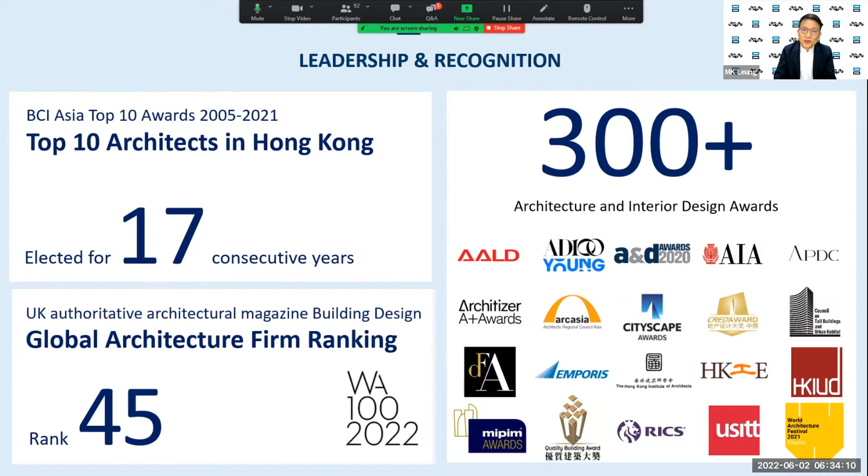We are so proud to join the World GBC Asia Pacific Network as its Advancing Net Zero partner. RLP has been named one of the global top 100 firms by the British media World Architecture for 9 consecutive years. We are the only architectural firm that has been shortlisted in the top 10 in Hong Kong for 17 consecutive years, with numerous green building awards locally and internationally.

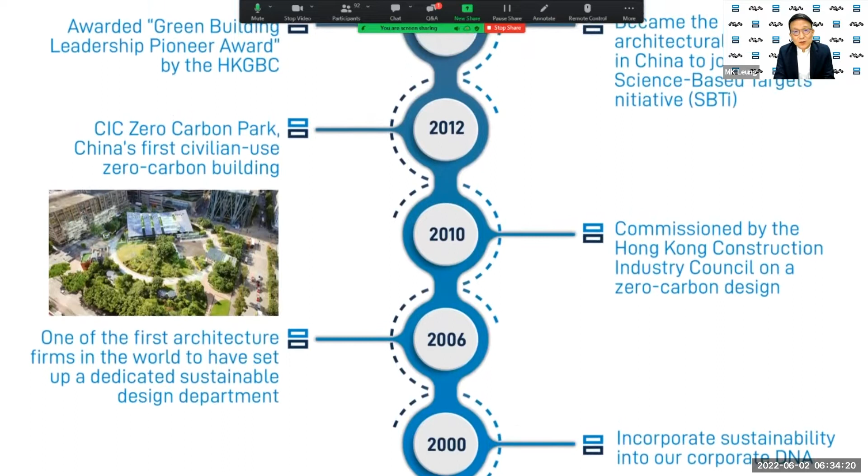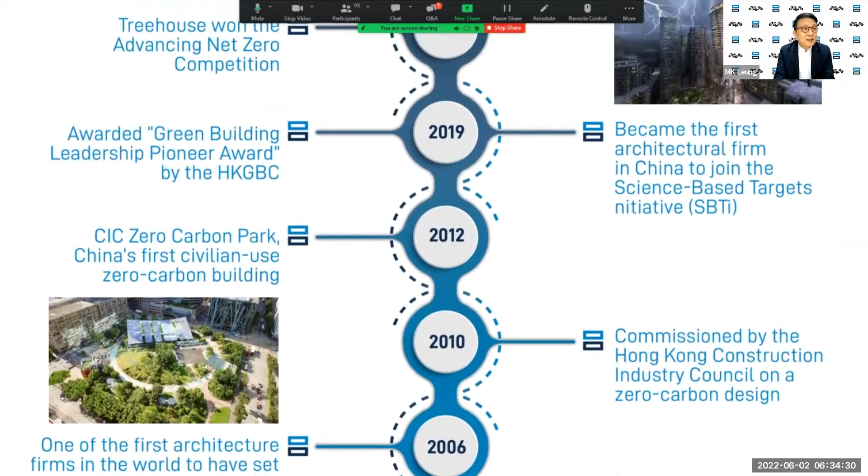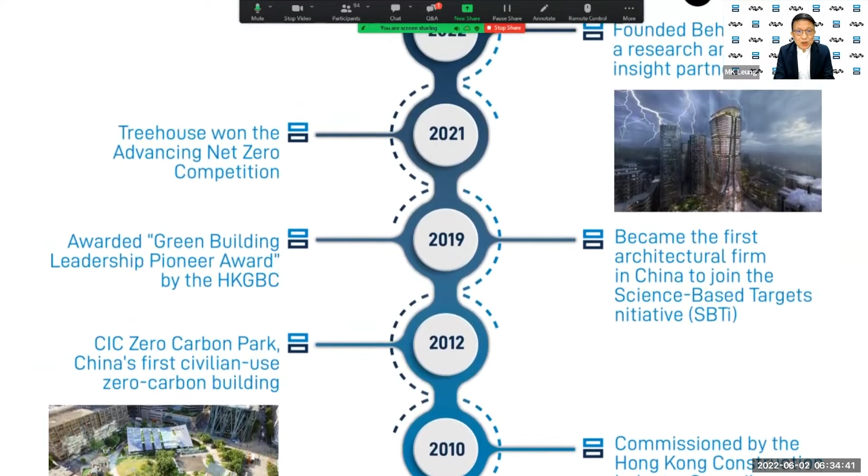On our sustainable design journey, we started about 22 years ago. We designed the first zero carbon building in Hong Kong back in 2010. We committed to our own corporate science-based target to reduce greenhouse gas emissions, and were awarded the Green Building Leadership Pioneer Award in 2019 by the Hong Kong GBC. Last year, our carbon neutral high-rise future workplace concept, Treehouse, won the Advancing Net Zero Ideas Competition organized by the Hong Kong Green Building Council.

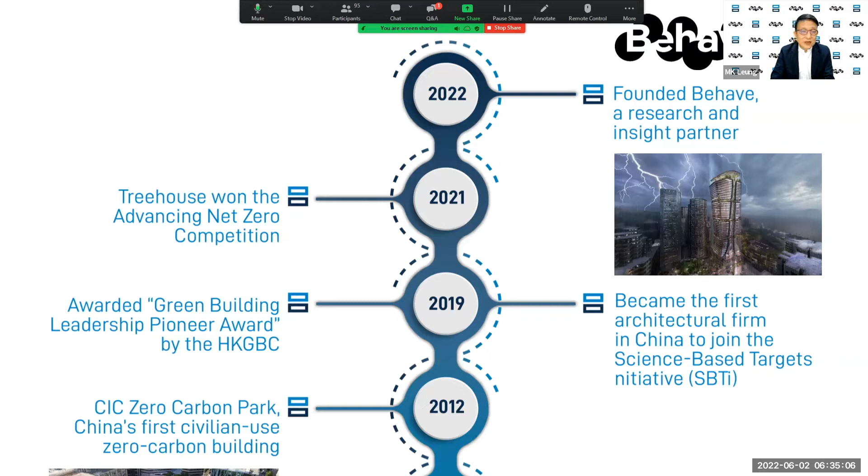The design was led by the research arm of our company named Behave. Behave will be officially launched this year, and our mission is to create future-ready cities. We seek to explore, understand, and design a more resilient future by putting people at the center of everything we do.

Cities are now at a crossroads. Technological disruptions, shifting geopolitics, effects of climate change, the global pandemic, these are all fundamentally changing how we live, work, and play. Our future generations aspire to and deserve a sustainable future. How we can create a sustainable future is more about people than technologies. It is ultimately driven by the aspirations and behaviors of this and coming generations, who are well aware of the causes and impacts of climate change.

The future of how we live, work, and play will definitely look different from what we experience today. Some people say the metaverse will be our future, where we will do everything in the digital world. However, research on the future of work indicates that hybrid work, comprising a balance of remote work and in-person work, is the most sought after model by employers and employees.

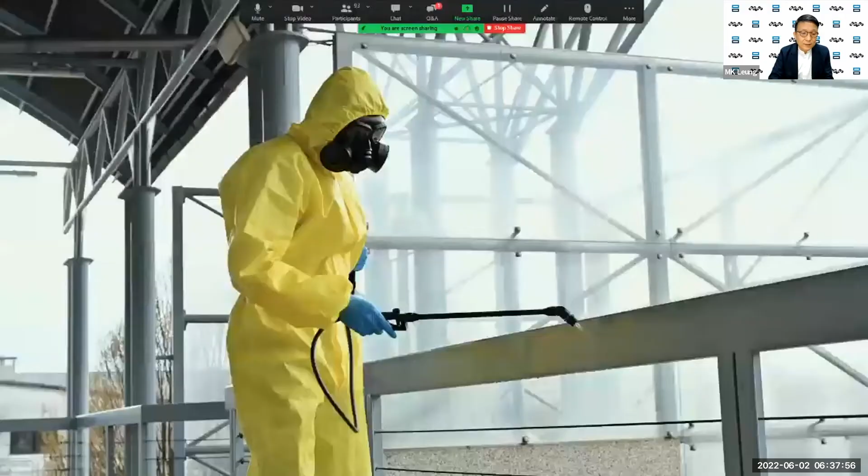We live in a generation of change. Global warming, pandemics, extreme weather have only inspired us to make change and create a resilient future by revisiting our roots. Nature, the one source that nurtures and gives us life. Nature wastes nothing, and in the perfect world, our existence not only complements it, but helps it thrive by achieving

carbon positivity. The concept of a sacred union between man and nature also runs deep in ancient cultures. Like the Chinese word for wood celebrates our place on Earth. Perhaps now is the time for us to reset by building an eco-conscious, integrated system and lifestyle.

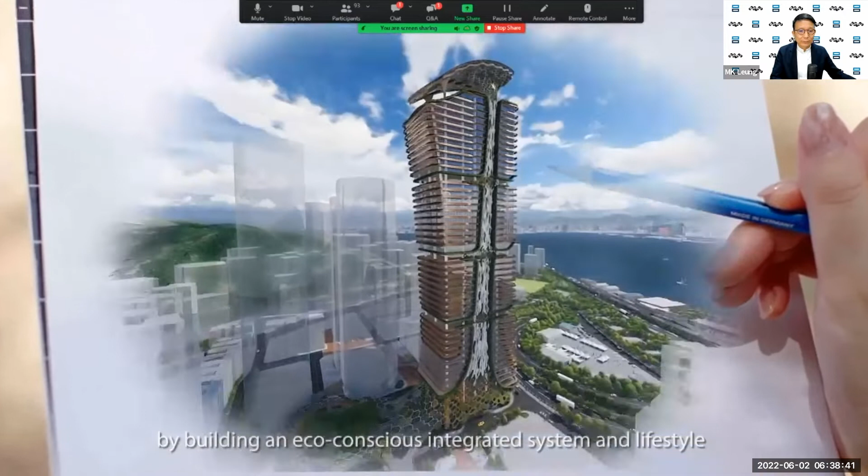Welcome to the Treehouse. This is a new caliber of workplace that promotes carbon positivity through cutting-edge technology, design, and management. To regulate the temperature of the building naturally, self-shading facades for upper stories are in place to avoid solar heat, as a rooftop PV system helps generate renewable energy while doubling as a shade for the roof.

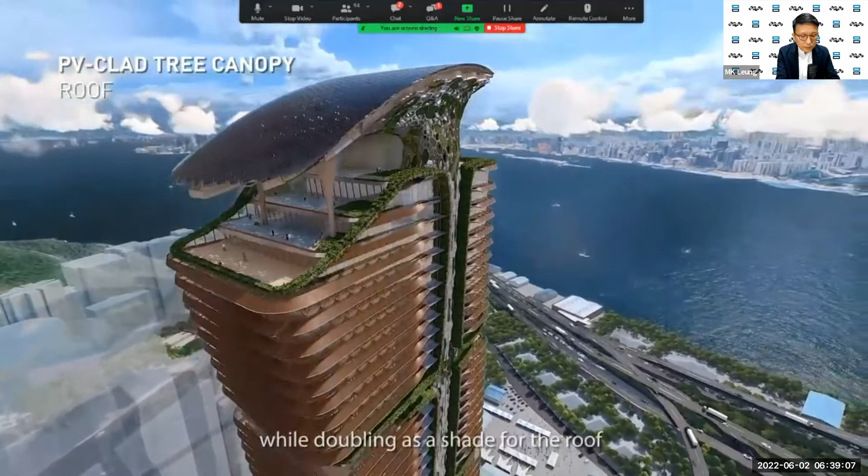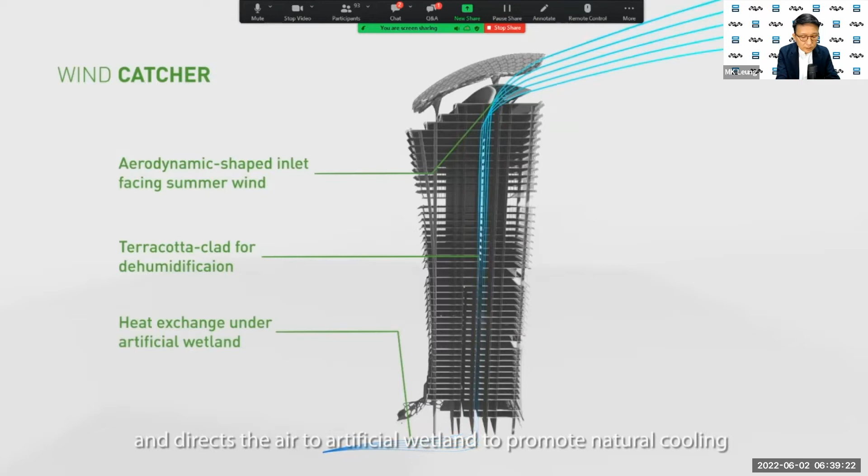Natural light is introduced in the building by large PV integrated overhangs with daylight reflectors. A wind catcher captures cool air 200 meters above ground and directs the air to artificial wetland to promote natural cooling. A BIPV-cladded solar chimney is also in place to generate natural ventilation and reduce heat transfer to the building interior.

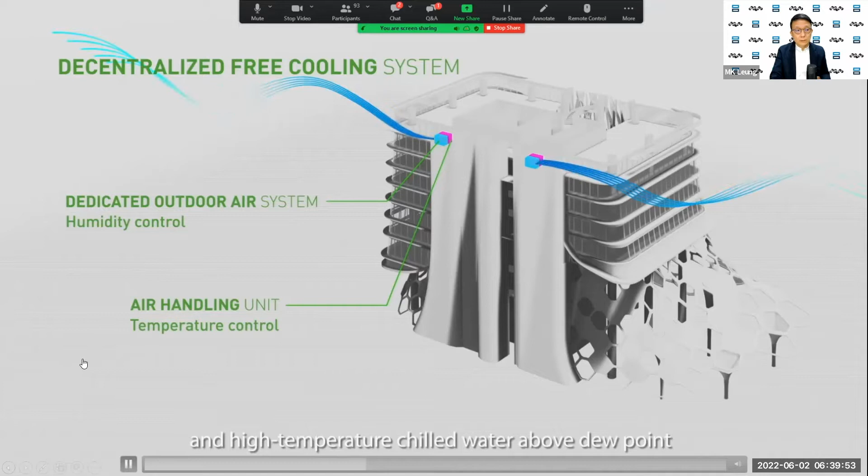Separate temperature and humidity control allow extremely high COP chiller and high temperature water above dew point to power our climate ceiling system. The phase change material thermal storage provides buffer to lower peak demand and to generate chilled water at night.

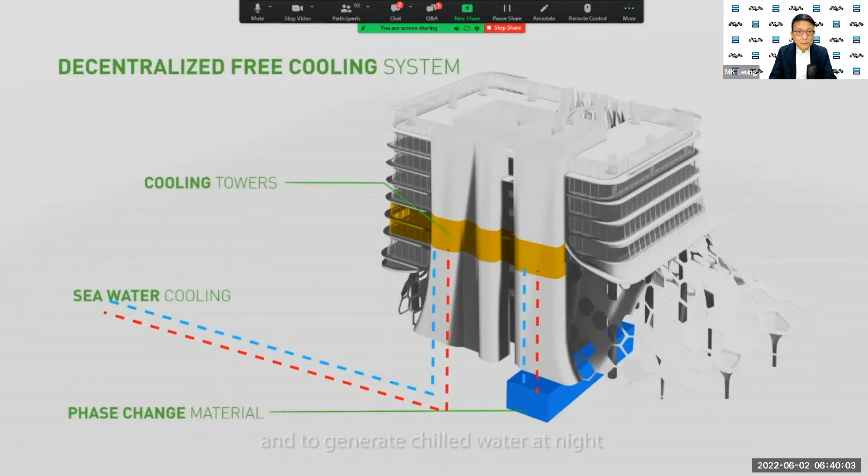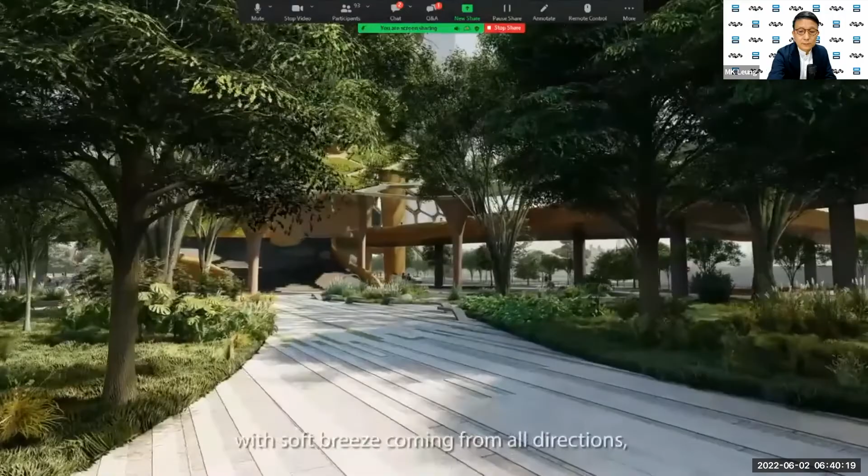The Treehouse is welcoming, and I feel like walking into nature when I come in, as the natural forms and greenery greet me. The space is airy and naturally lit, with soft breeze coming from all directions. But beyond that, I'm inspired by its carbon-positive vision.

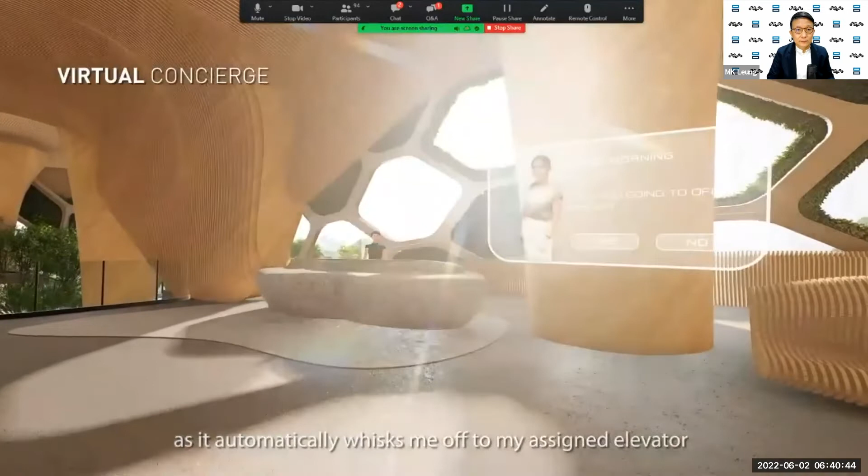I get rewarded with eco-tokens for my sustainable office wear every day. It motivates and empowers me to step up my game and do even more. The virtual concierge also comes in handy as it automatically whisks me off to my assigned elevator when I check in on my phone. We don't come into the office every day like we used to before the pandemic, but every time I come in, I enjoy every moment with my colleagues.

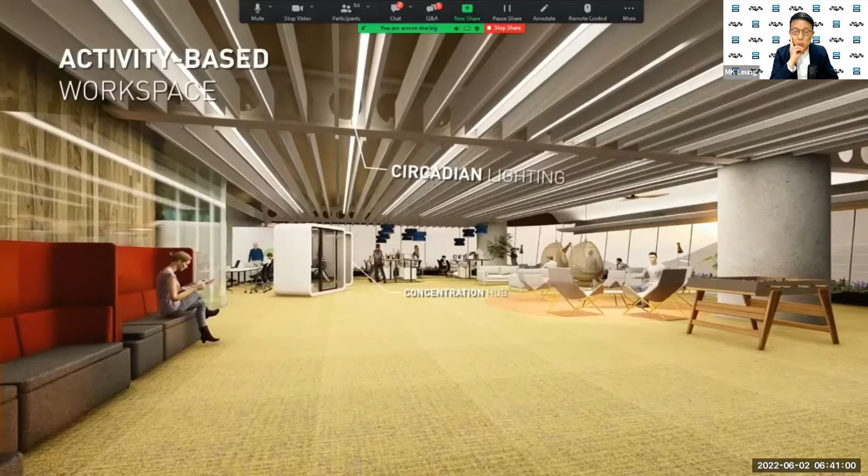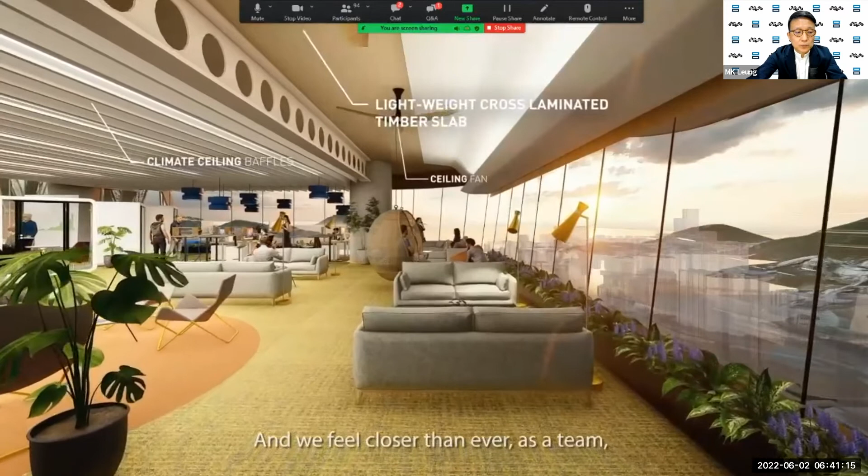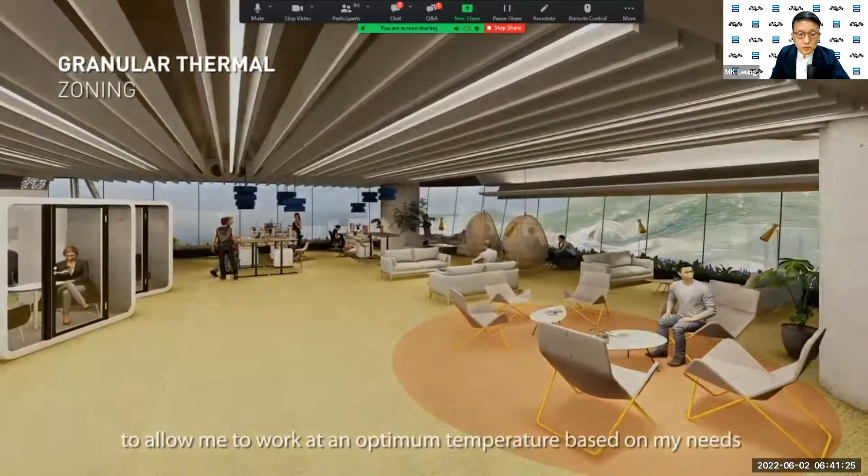The office is completely versatile and supports on and off-premise work, especially with the Edge data center and virtual desktop system. Fixed desks are obsolete here, and we feel closer than ever as a team, working alongside one another at these mobile workstations. The office has been carved up in thermal zones to allow me to work at an optimum temperature based on my needs.

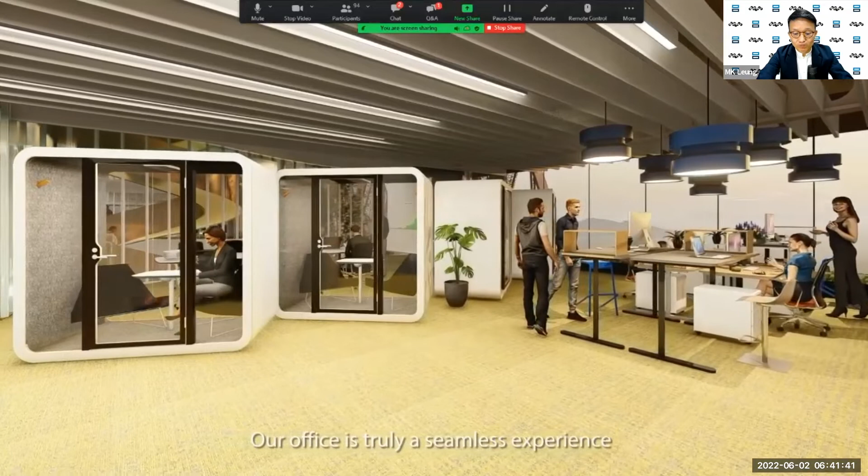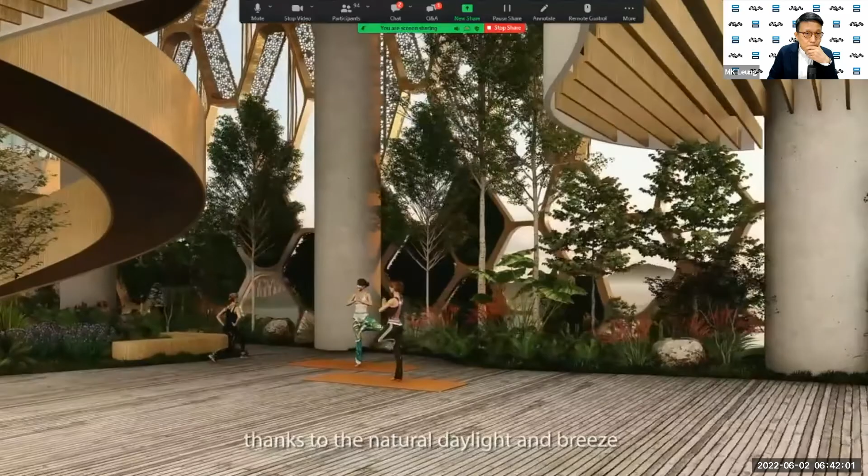The humidity in the office also mimics that of nature's for our best comfort. Our office is truly a seamless experience that takes into account our habits and patterns, so the space can be preconditioned for any occasion. I come to the Sky Commons communal area for my lunchtime yoga class and occasional social events. The space feels open and warm thanks to the natural daylight and breeze through the adaptable building shutters.

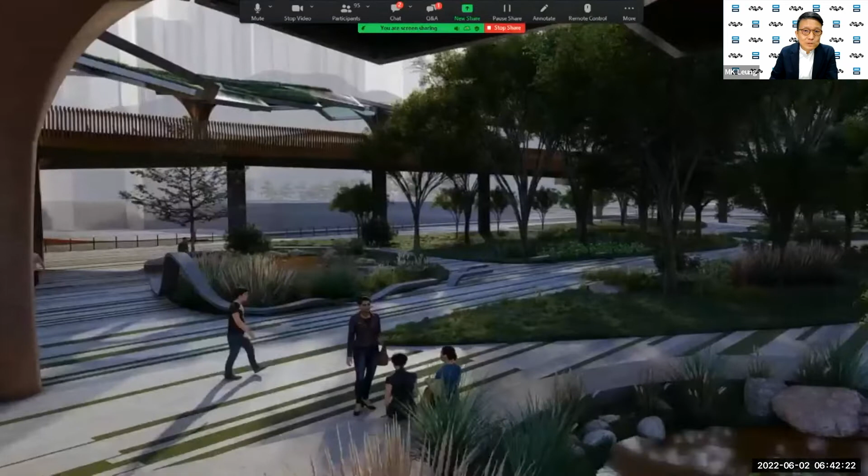Self-sanitizing conferencing equipment are also available for hosting meetings here, and are usually on energy-saving mode until we use them. When I leave work, I want to know that I am making strides to change the future. I want to reinvent our relationship with the Earth. Working at the Treehouse is my first step to making positive change in the world and be the catalyst to the city's chain reaction for change.

The Treehouse is not only a place for work, it sows the seed of change in our minds, reminding us that only when man and nature come together can we make change and create a sustainable future.

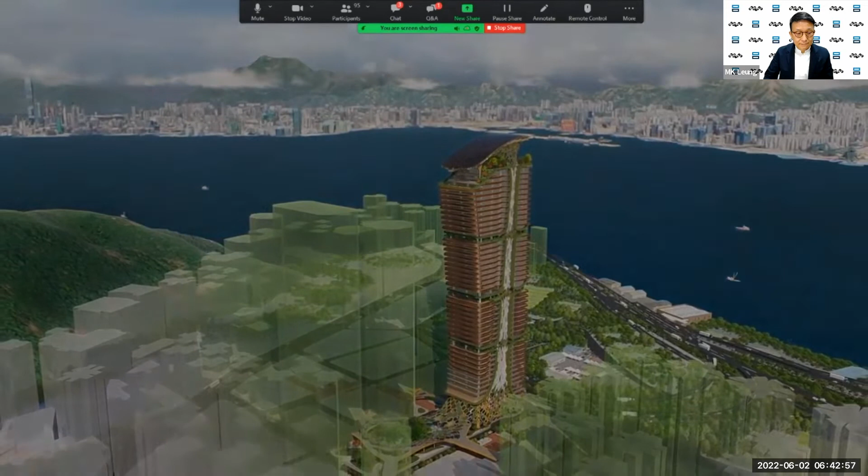I hope you enjoyed the video, and I would like to highlight 3 key design themes of Treehouse, which are interactivity, on how people better connect and interact with nature; flexibility, which is from spatial, functional, environmental, and phygital perspectives; and also user centricity, for a happy, healthy, and harmonious workforce.

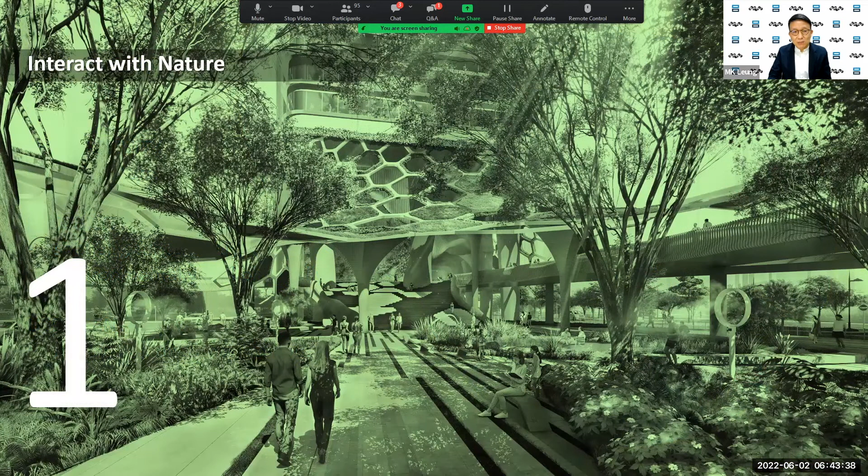Firstly, about interacting with nature. Our design strives to reignite the affinity with nature, and biophilic elements are woven spatially and visually throughout, from a native urban woodland and artificial wetland, green facades, green roofs, and roof gardens, to interior green walls, biomorphic forms, patterns and colors in materials and furnishing.

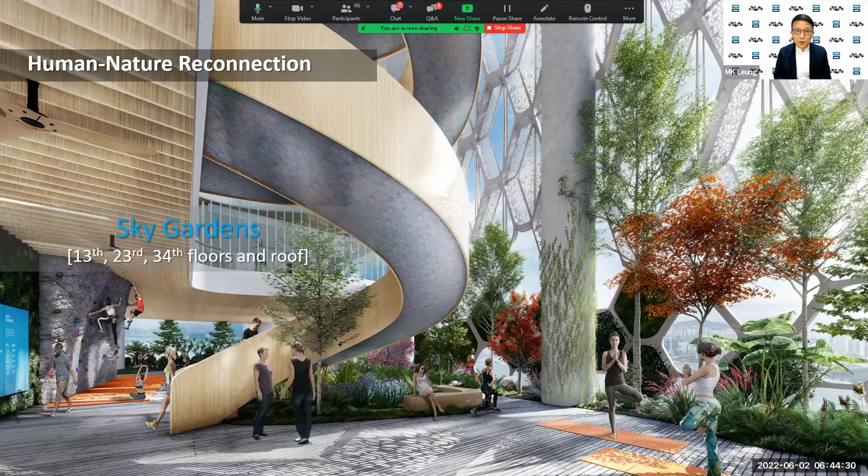Occupants are never too far away from a tree. Research confirms evidence that biophilic design helps reduce stress, improve mood and self-esteem, and enhances cognitive skills and work productivity. The multi-level sky-rise greening design achieves site greenery ratios of 137% and a tree coverage of about 31.4%.

Biodiversity and ecological connectivity is considered and woven into the fabric of the buildings and with the city, helping reinforce the urban wellness. Transpiration's cooling in the public realm and communal areas of the building helps provide a benign outdoor and semi-outdoor environment, encouraging occupants to come out from the air-conditioned boxes for an active living.

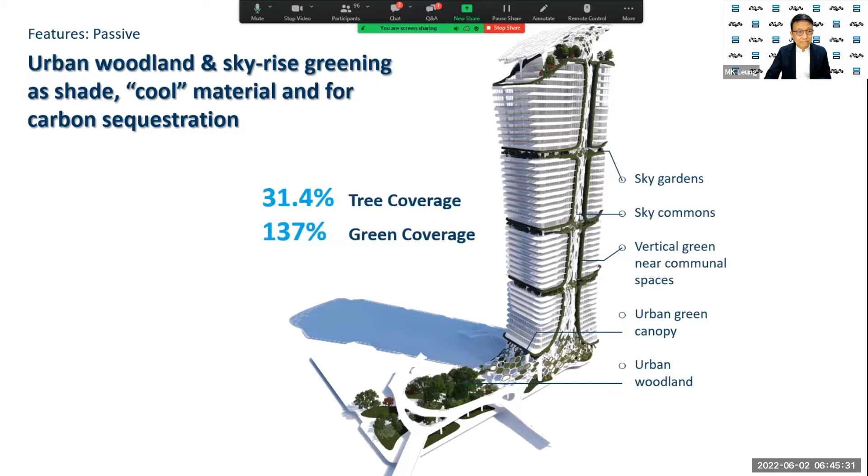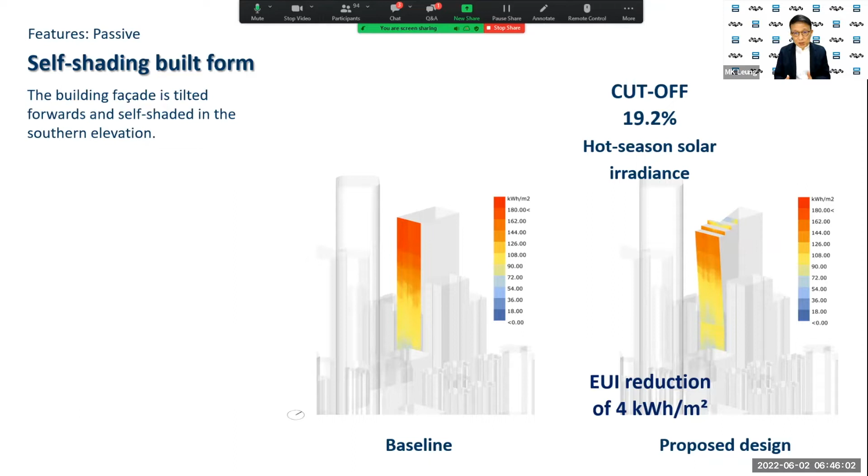The building facades respond to the sun path and are tilted forward on the south elevations for self-shading. The simulation results reveal that the self-shading geometry provides 19% solar irradiance cut for the south orientations. The setback minimizes direct solar heat gain in the interior, which in turn decreases the cooling load.

Spatial planning also adopts west-facing side core to provide a thermal spatial buffer for the tenant space. This is especially important for upper floors that receive higher solar irradiance.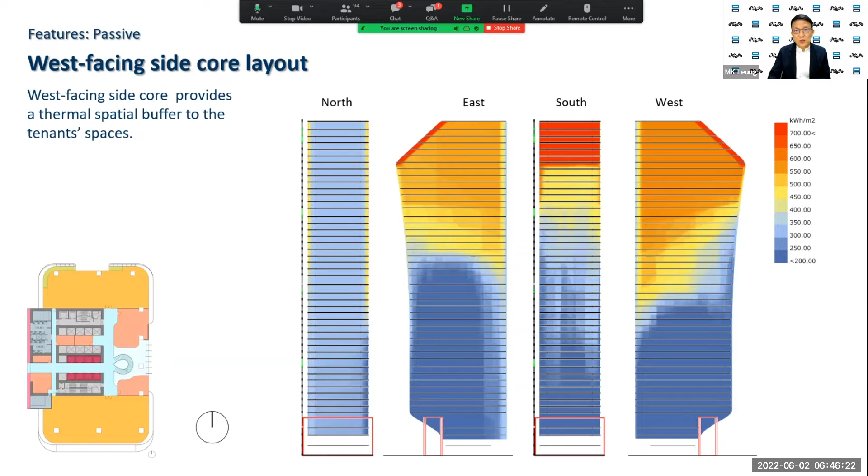Besides mitigation of urban heat island, the woodland and the constructed wetland also help manage stormwater runoff and water quality. Added climate resilience is provided by the infiltration blanket on top of the basement with the geocellular storage system under the pervious paving.

Secondly, on flexibility. Flexibility from spatial, functional, environmental, and physical perspective. The proposed design creates a diversity of third space for activity-based working. Besides open plan desktop workplace, quiet work booth, formal and informal conference rooms, soft seating in the common areas, cafes with hot desks, loops for walking meetings, and semi-outdoor terraces. These are some of the many types of space that are available for the occupants.

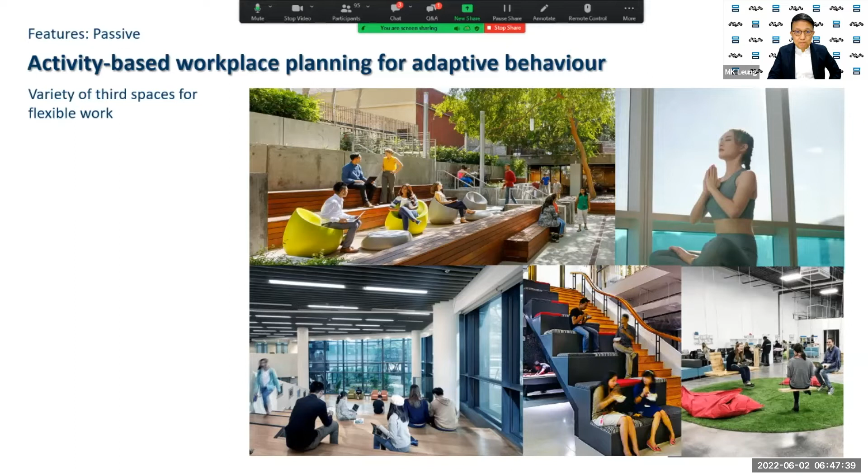To promote positive behavioral change is crucial and of utmost importance for net zero office. Occupants in super cool biz dress code, especially during summertime, will be recognized and accredited by the apparel attribute recognition video technology at the entrance. Individuals recognized with super cool biz outfit will be rewarded with incentives in Treehouse.

A hybrid of remote work and office work distributed in Treehouse actually is envisaged. Day-to-day workplace in an office will vary based on changing needs of the collaborative teamwork. Conventional office model does not cater for such variations of workforce day-to-day. Treehouse offers a new model of workplace, in which the boundary of tenant, landlord, managed premises is flexible to cater for the post-pandemic workforce.

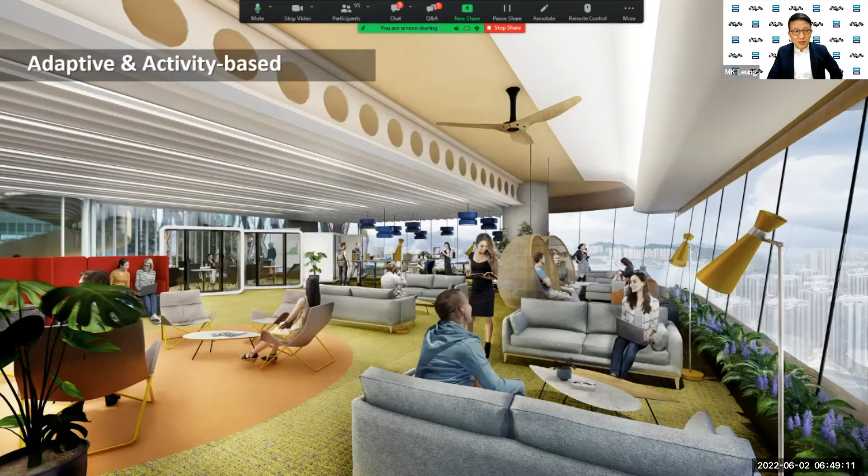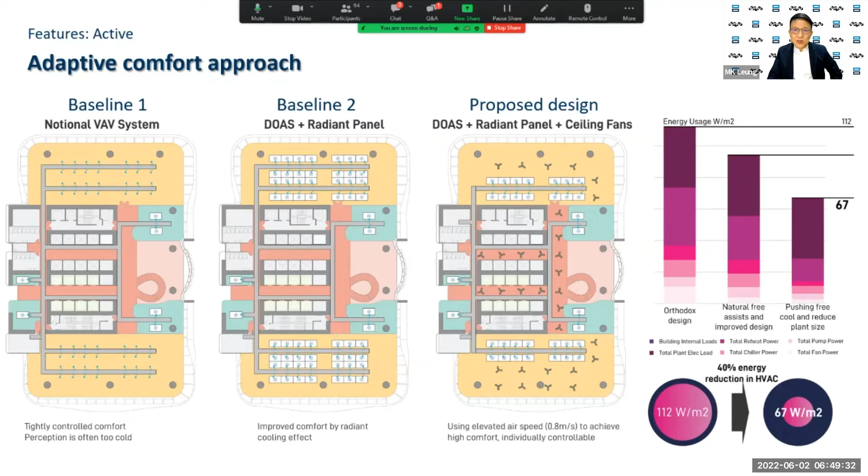Occupants are encouraged to move around in the different types of workspaces based on their preferences and choose when, where, and how they work throughout the day. The proposed design adopted dedicated outdoor air systems on each floor for fresh air and the radiant cooling near the core zone and ceiling fans in the perimeter zones. This reduced about 40% of the HVAC energy.

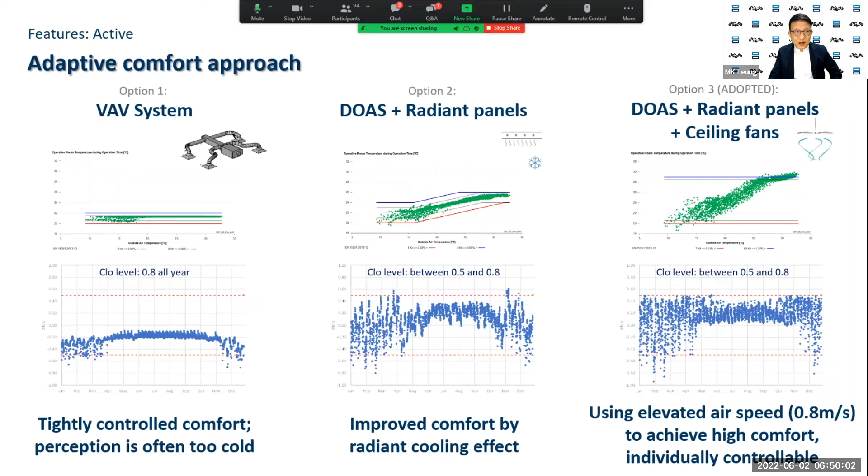What's more, the design avoids overcooling of the spaces and makes use of the elevated airspeed up to 0.8 meter per second to achieve high comfort but low carbon and individually controllable thermal environment, resulting in a predicted mean vote of plus or minus 0.5 for 90% of the occupancy.

The temperature gradient is achieved around 25 degrees plus or minus in the core zone by conditioned air from the radiant cooling and the AHU, and 27 degrees in the perimeter by the ceiling fan and the conditioned air.

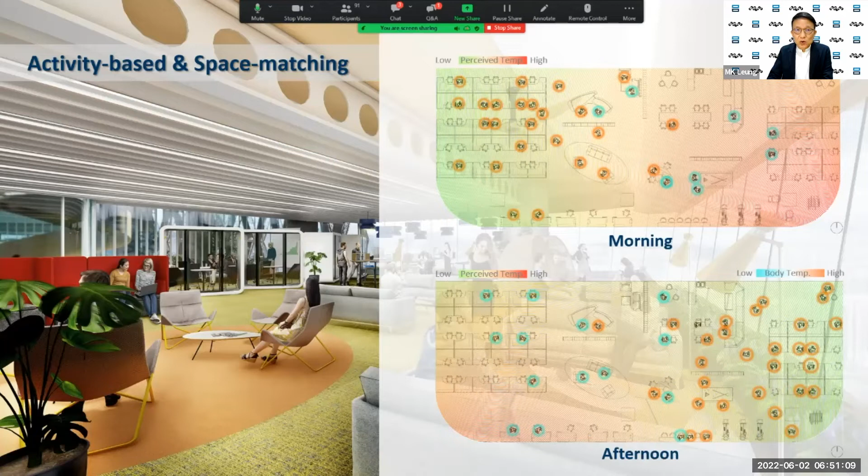Occupants may check in at the Sky Common physically or via smartphone app for the desired types of workspaces and request the virtual concierge to locate a colleague based on their needs for collaborative teamwork. A space match function will learn the thermal preferences of individuals and match spaces according to their personal comfort preference, powered by the IoT infrastructure and the advanced indoor positioning technology deployed.

Last but not least, on user centricity, the net zero solutions should foster a happy, healthy, and harmonious workforce. The integrated facade of the tenant spaces in Treehouse is designed for excellent daylighting while minimizing glare and reducing solar heat for occupants' wellness. External shade of facade and tilted glazing of the upper story respond to the higher urban vertical solar irradiance.

More than 2 meters in depth, the overhang in the upper and the mid zone of the tower has an optimized tilted angle towards the south, completely cutting off direct solar heat gain from the south. Energy consumption simulations show an EUI reduction of over 7 kilowatt-hours per square meter.

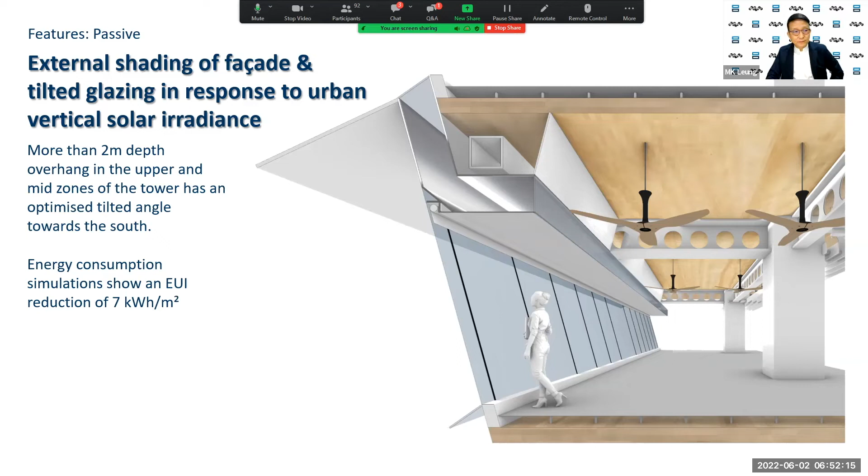The extensive overhang for solar shade may impact daylighting of the interiors. We can integrate the horizontal daylight reflectors with sensor control and a circadian light algorithm to diffuse and project daylight deep into the interior of the office.

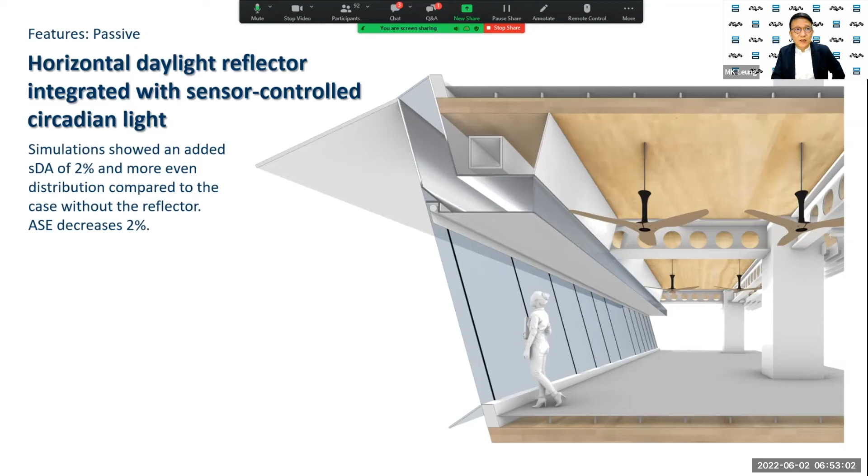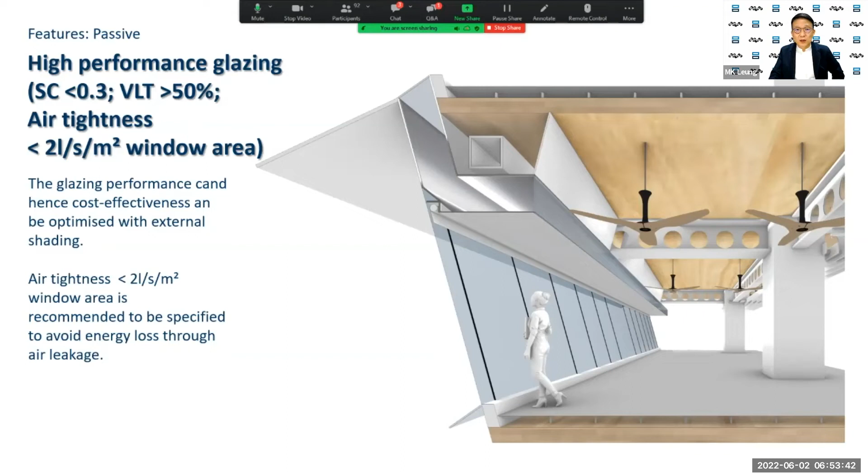The desired glazing performance and enhanced cost effectiveness can be optimized with the external shading design. A reasonably high performance glazing with a shading coefficient of about 0.3 and visual light transmittance of over 50% is specified. Air tightness of less than 2 liters per second per square meter for the window area is recommended to avoid energy loss through air leakage, and also to make sure there's no condensation from the radiant cooling.

We also conceived the concept of Sky Commons for the vertical communities in Treehouse. 3-story Sky Commons are planned throughout the tower, and each one acts as a social hub with a lot of landlord-managed shared amenities, which are available for tenants on demand. The amenities provide multifunctional space for focus work, collaborations, meetings, workshops, and each Sky Common is linked up between the floors by a prominent feature stair to promote active movement.

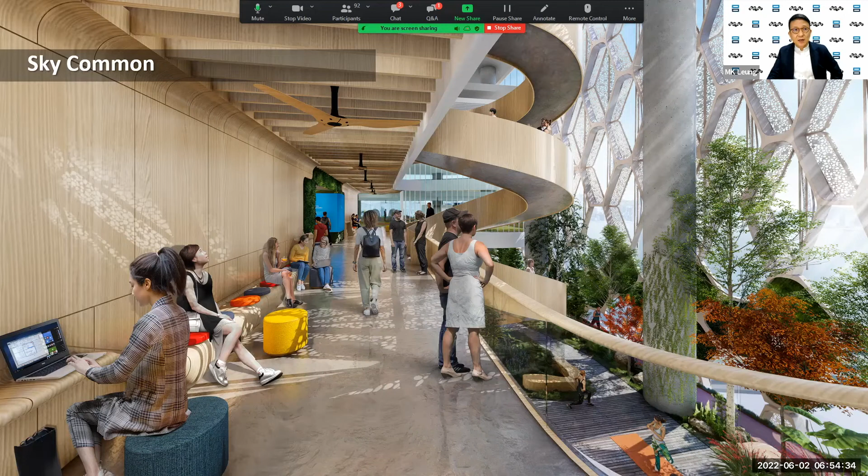And the Sky Commons are naturally ventilated, supplemented by high volume, low speed fans. The design corresponds to the urban microclimate and its variations in a vertical city, which can be quite substantial, as we found out from the simulations. Automated shutters are in place to regulate the wind, the air and the solar environment.

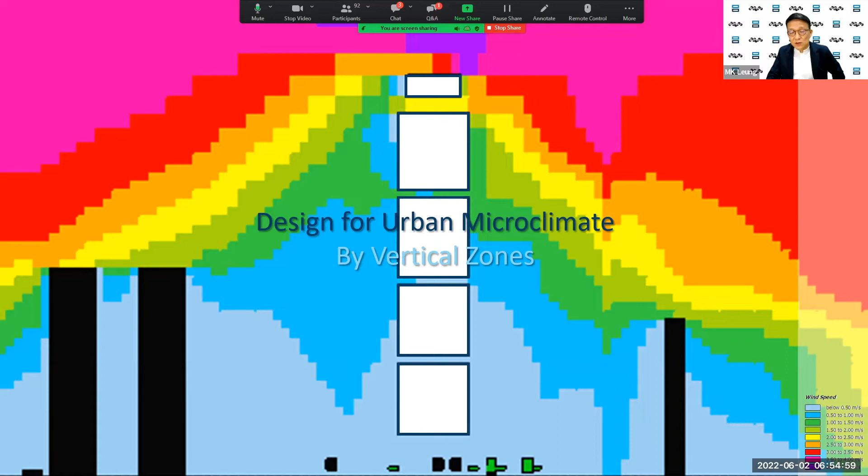The activity-based workplace concept is empowered by the Edge Data Center together with the virtual desktop infrastructure. It enables them to work anywhere in the Treehouse. The virtual desktop infrastructure located in the buildings also enables more efficient cooling of the sensible heat from the ICT equipment, resulting in a reduced cooling load within the occupied space. It is also estimated that this solution will substantially reduce the amount of copper IT cabling in the buildings by about 40 tons.

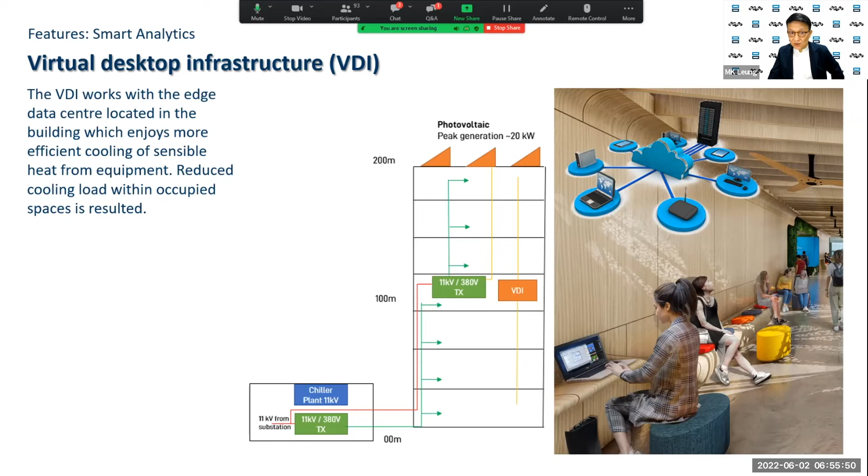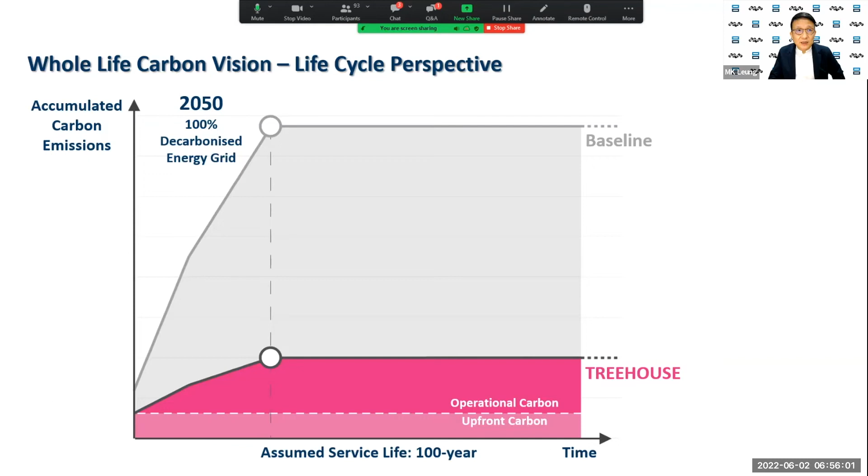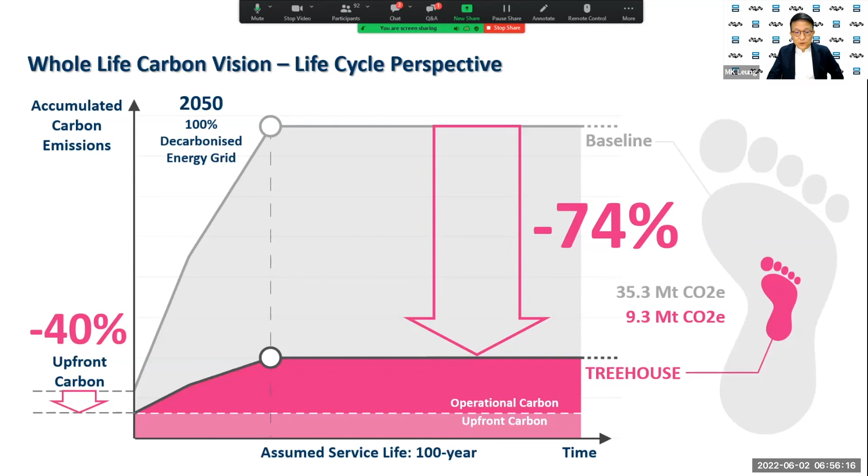In summary, Treehouse managed to reduce over 40% of the upfront carbon at the outset, and eventually achieve a 74% reduction of the accumulated carbon footprint over its assumed service life. Achieving net zero is an exceptional challenge, especially in a hot and humid climate for high-density cities.

Taking a systematic life cycle approach is crucial to address the dynamic challenges of future work, user expectation, cost, supply chain readiness, and regulatory barriers. A wide range of strategies have been reviewed in Treehouse, and we have mapped these strategies according to their positive impact achieved versus the potential challenges they face, based on expert opinions and stakeholder views. This informs how we may implement these strategies in the future.